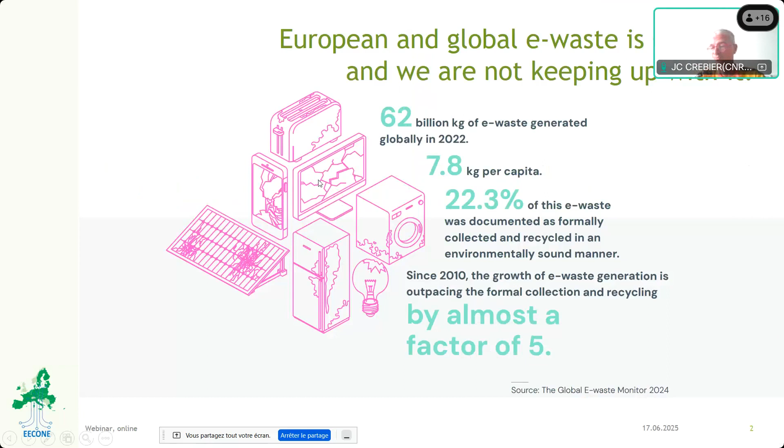We are working on 4 key objectives, which are to define green electronic components and systems, also to make those components and systems as green as possible, not only from a greenwashing point of view, but actually trying to implement innovative design solutions as well as manufacturing techniques. All this work is developed in the frame of several use cases. And in the previous webinars, we have started to present those use cases. And today, we are going to see the 3 last use cases that will be presented throughout our webinars.

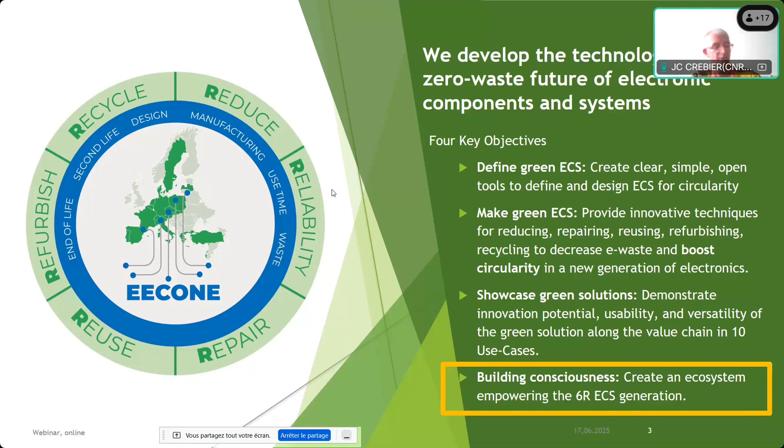The reason why we do this is because one key contribution of EECONE project is also to develop and to build this consciousness around circularity and eco-design in electronics components and systems. We want to clearly empower the community around these 6R strategies and eco-design. So today, we are going to listen to 3 use cases that are currently under development throughout the EECONE project.

First of all, we will have Thomas Ewald from BOSCH, who will speak about from waste to worth strategies for sustainable PCB and component reuse in automotive applications. Then we will continue with Christian Rein from Danish Technological Institute, who will present inks for robust and sustainable electronics. And we will conclude this webinar with Merck Tetik from Beko, formerly ARCELIK, presenting the creation of critical raw material value chain, traceability system, and recycling strategies in appliances.

So before giving the word to Thomas, I just want to mention also that in addition to these webinar activities, we are currently, and actually it is this week, running a summer school here in Grenoble in the frame of EECONE project. This summer school is dedicated to ramp up the community in terms of knowledge related to eco-design and circularity in electronics. I hope we will be able to report in a future webinar about this event.

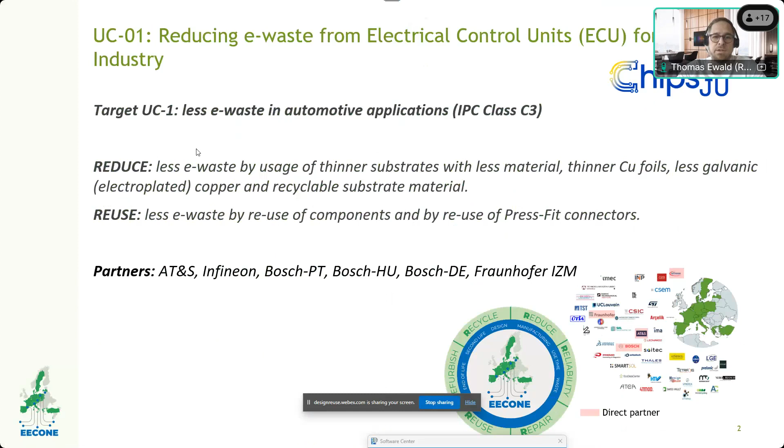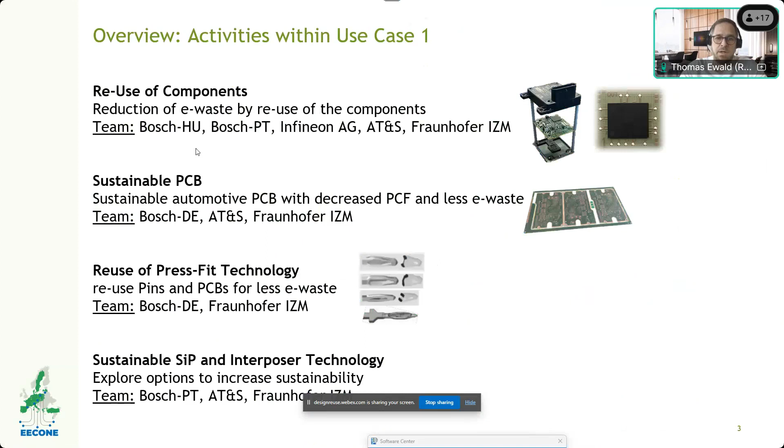And last but not least, sustainable system in packages and interposer technology, where we explore options to increase the sustainability also in this field. So all about assembly and interconnect technology with focus on automotive electronics. So then let's directly jump in the first activity. It's the reuse of components.

And here, as already mentioned, the target is de- and resoldering components, and we chose a BGA component from a radar ECU from Bosch, and the BGA is from Infineon. And the target is to be able to de- and resolder it without losing reliability. At the moment, we developed a profile for de- and resoldering at the rework station. This was very tricky. It took a lot of time, but meanwhile, it works. And we eliminated all the failures.

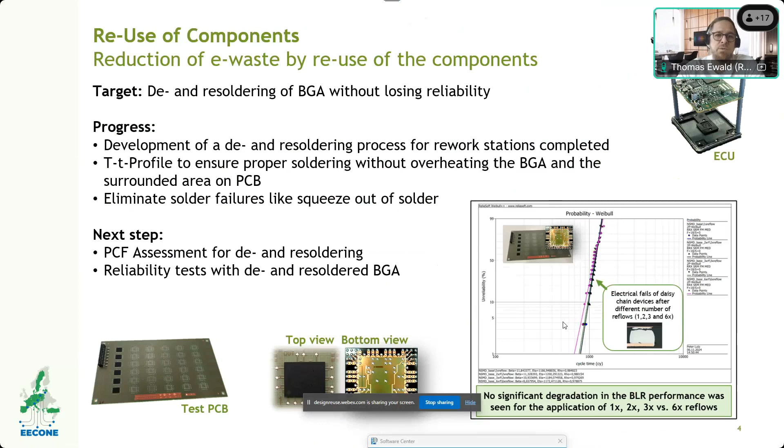And then the first question, of course, was what will happen to the reliability when we do more than 3 reflows, and luckily it turns out that there's nearly no impact, and now we are looking forward to the reliability tests of the de- and resoldered BGAs. So that's in a nutshell what is going on in the first activity about reuse of components. In the second activity about sustainable PCB.

Here the target is the sustainable automotive PCB, IPC class 3, with decreased product carbon footprint and less e-waste. And here we chose a high performance compute ECU to build a demonstrator with a sustainable PCB. So focus is clearly on the PCB, not on the ECU. And this sustainable PCB in detail is that first we made it thinner, so we reduced the thickness of the FR4 material. Second is that we introduced recyclable material, which was very new, introduced in the market by Shengyi.

And the third one is to apply less copper by using thinner copper foils. And the fourth one is a bit innovative. This is to use less galvanic copper, because this is by far the most energy consuming process in PCB manufacturing. And if we were able to use less galvanic copper, then we would be able to reduce a lot of energy consumption, and this would be very good for the product carbon footprint.

All this goes along with some challenges for reliability aspects, and this is what will now be investigated in depth. So the demonstrators are already built and already tested, and now we're waiting for the evaluation of the results. And hopefully we will find out that it works very nicely and smoothly with these sustainable PCB measures. Another aspect is to calculate the product carbon footprint benefits from this sustainable PCB, which is done at the moment by Fraunhofer IZM, so that in the end we really have a kind of quantitative proof of how much we improve with regard to product carbon footprint and also to e-waste.

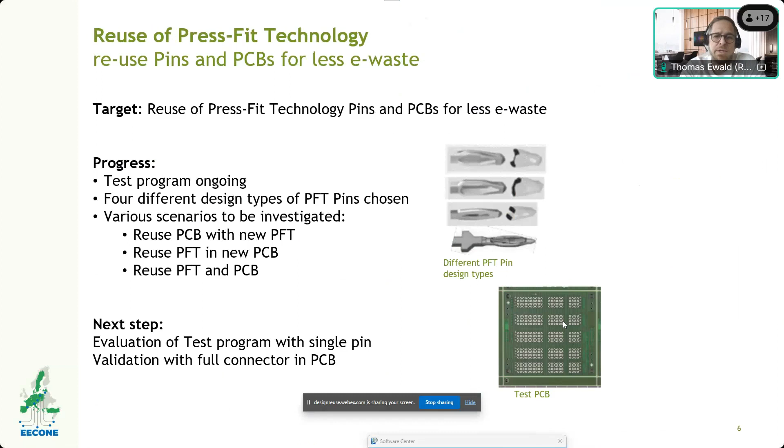And last but not least, we are also looking in the field of sustainable system in packages and interposer technology. And here also we want to try to make this technology more sustainable. So the first one is the reuse of SIP and interposers. So for interposers, we discarded it because this is not a real business case when you have to remove all the components, the solder, the copper, and then to reuse the interposer again.

This doesn't make sense from a business point of view, but what might be interesting and what we are looking at is the reuse of the whole SIP module. This is a bit similar like the BGA reuse of components, where you remove the balls and reball it again, and then you can use it again.

Another very obvious thing is to investigate how thin can the interposer of a SIP be. So the same like in the PCB, because if you make it thinner, then you save material, and less material means less product carbon footprint and less e-waste. And here we are investigating what are the lower limits, because warpage will be an issue then at some point in time. And also IZM, Fraunhofer in Berlin is calculating the life cycle assessment of these thinner interposers.

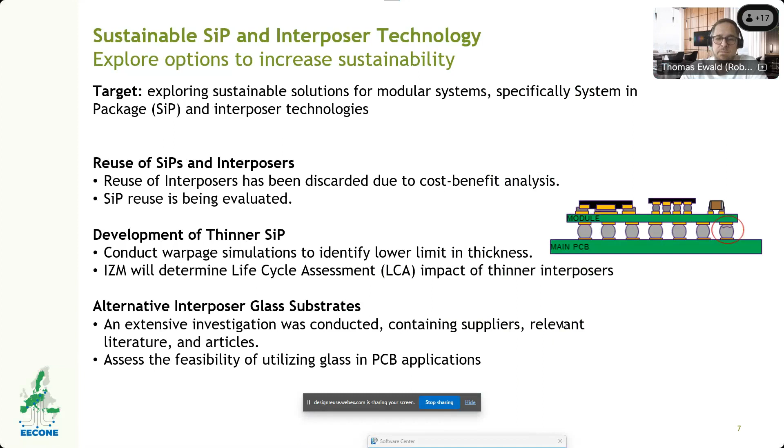And last but not least, we are also looking in the field of other technologies which are really out of the box for automotive applications, like glass substrates. They have many advantages, but also some challenges with regard to reliability. And here we are doing a kind of screening of the market and trying to see if there's some innovative ideas with regard to sustainability. So that's in 11 minutes, in a nutshell, what is going on in use case 1.

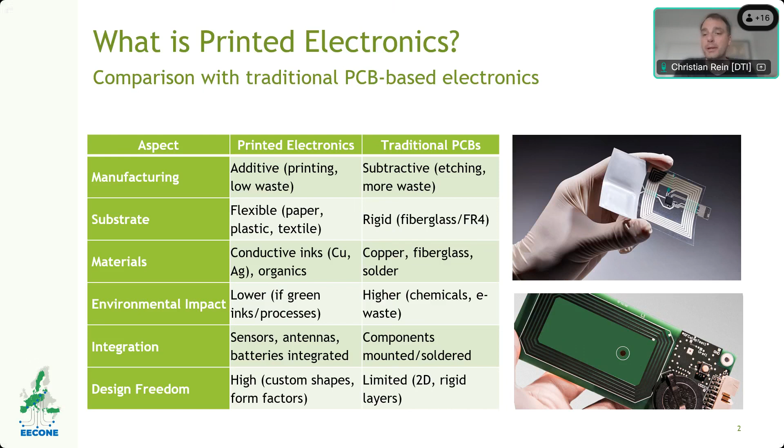And the use case that we have here in EECONE is what we call membrane switches, which are normally produced by the Danish company Melsontech. And we are collaborating with Synano, that is producing the carbon inks for this design. And we are developing conductive inks for this use case. Normally, these membrane switches, also known as keyboards, are meant to be used in harsh environments where they are used as input for operators operating machinery.

And the system overall is a multi-layered system of plastic that can be attached on the surface, and is currently using silver as the conductive tracks. Carbon is derived from fossil-based fuels, where you are then using the carbon layers to provide mechanical or friction resistance on certain areas of the electronics that otherwise would lower the lifetime of the overall electronics.

So in use case 3, we'll try to improve these membrane switches through the 6R strategy. This involves reducing the environmental impact and its vulnerability to environmental conditions, hoping that we can increase the lifetime. And it requires us to look at the very material composition of the inks used in producing these membrane switches. This also includes the use of eco-design in order to optimize the overall composition and choice of materials.

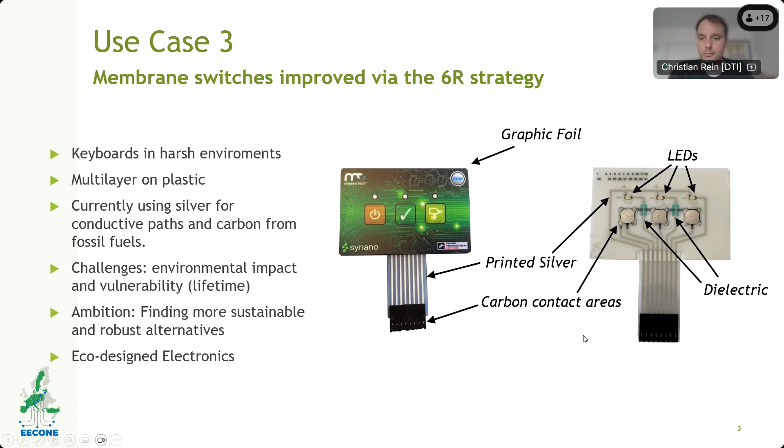Let's see if we can go on.

The inks are normally determined by a combination of various components. There are the fillers that provide the overall functionality of the ink. For conductive ink, this would of course be conductive materials, such as copper microparticles, gold nanoparticles, silver flakes, or carbon nanotubes, mixed up in a solvent, a carrier for these filler materials that can also modify the rheology or drying behavior of the overall ink.

The binder provides the adhesion between the material and the substrate, which is very important when you're doing this printing. And then we often also look at the rheology control and stabilizing in order to make sure the printing process and the lifetime of the ink itself can last as expected.

As you can see here in this scanning electron microscope image, you have an agglomeration of particles. Some of them are surface passivated, for example, to provide the right stabilization. All of this is mixed into the ink, as you can see in the picture.

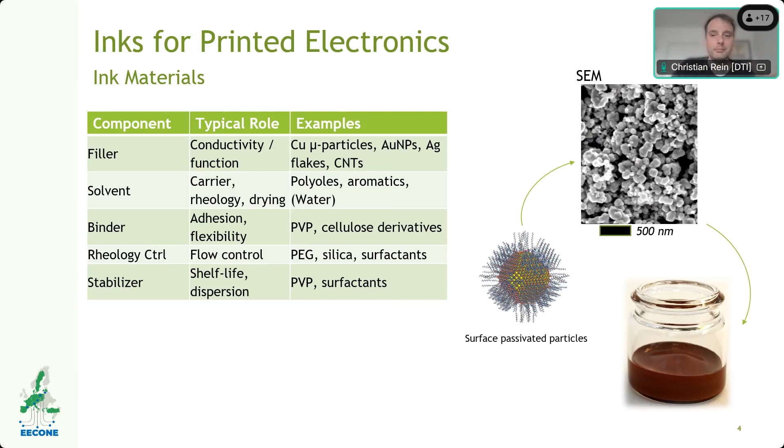For example, for inkjet, you would also take into account density and surface tension in order to have the right flow dynamic. Then there would also be similar considerations if you're doing roll-to-roll production for upscaled production.

So when you're looking at the printing, here we're showing the copper ink that we had in the picture before. We are applying it to the print screen, flooding the screen, and then afterwards we have it on top of the substrate, the plastic, for example, where we are then squeezing down the material to create the printed tracks, as you can see in the middle image.

After this printing is done, you need to remove the solvent again. Now just going through the hassle of mixing everything in, you need to take out a lot of the organic material, otherwise you're just blocking the conductivity. Through that, you first evaporate through the curing, and then put it through a post-processing step of sintering. For example, with copper inks, you need to make sure the copper particles are fused together through this sintering process in order to provide macro scale conductivity throughout the entire length of the electronics.

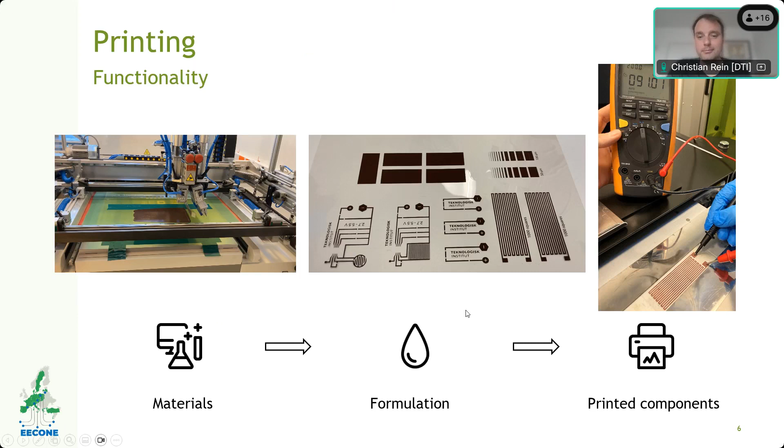We often use a 1,000 square standard test grid, as you can see in the last image, in order to validate the conductivity. There are also other ways of validating the quality of these inks, such as making sure it can withstand adhesion and mechanical stress. Otherwise, it's of little use if it just flakes off.

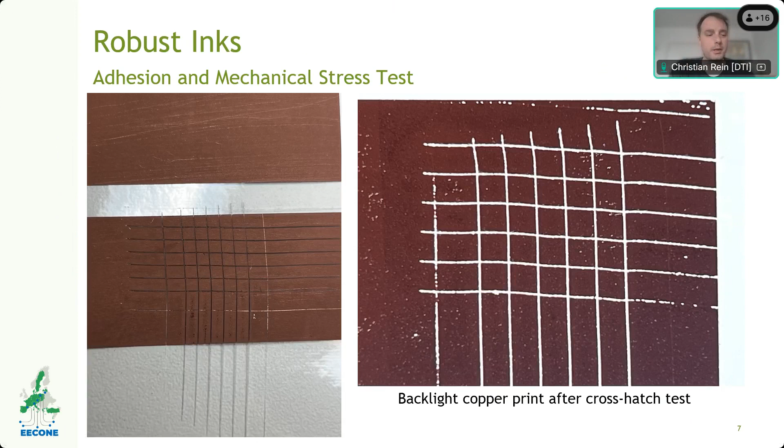So we apply, for example, crosshatch testing, where we're scraping and brushing and trying to peel off the material after we have deposited it. Based on that, we can also get an idea of the application worthiness for electronics.

We also look at, for robust inks, the need to withstand a lifetime of use. For example, these membrane switches should last several years in a harsh environment. For that, we need to have the electronic powered while cycling the humidity and temperature in environmental chambers. Then we follow up by investigating the failure mode - what went wrong, how can we improve the design, and make sure the electronic lasts longer. Electronics that last longer is also electronics that you do not throw out, thus reducing waste.

One of the questions that sometimes comes up when you're suggesting a new material to include is, well, why didn't the status quo work? Right now, a lot of silver is being used in printed electronics since it's been the standard, silver flakes. But one of the things that needs to be taken into account is the very high climate change potential and overall environmental impact that using silver has in comparison with copper.

Shifting from silver to copper reduces the overall environmental footprint by 96.5%. Thus, there's a very large driving force to move into the copper particle regime instead. This is what we have been focusing on in EECONE.

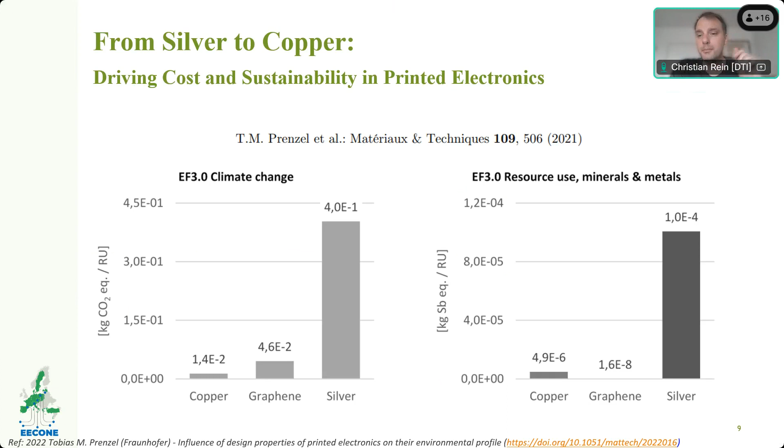In this project, we are looking at other aspects as well. For example, there's also the aspect that silver is being used in a lot of key technologies, so there's a danger that silver is a scarce resource. And then there's also the silver price as a driving factor - when you look at bulk materials, copper has a lower overall price compared to silver. So that's also an industrial interest if we can nail down the right ink formulation in order to introduce copper inks instead of silver.

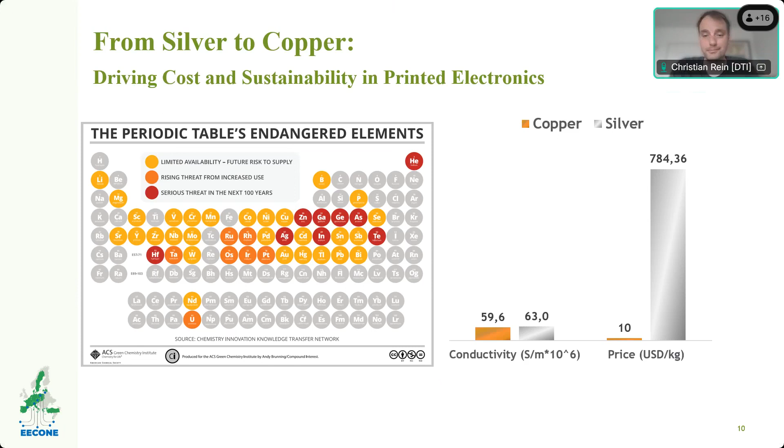Some of the tools we're using through this overall redesign of materials and electronics are safe and sustainable by design methodologies, life cycle assessment, but also the eco-design tools that's been developed. There's some also here in EECONE. It allows us to get a better track of what kind of materials can be put together and what the benefits would be.

One idea is that we could look at a more circular system for materials, where normally we take particles extracted from primary resources, formulate those into copper inks, and then screen print them to create the copper electronics. After shredding or end of life, we would like to leach out the elements, leach the copper, and then reform the copper particles from the copper salt in a resynthesis process, as an alternative to the more non-circular end of life where we would have incineration or landfill.

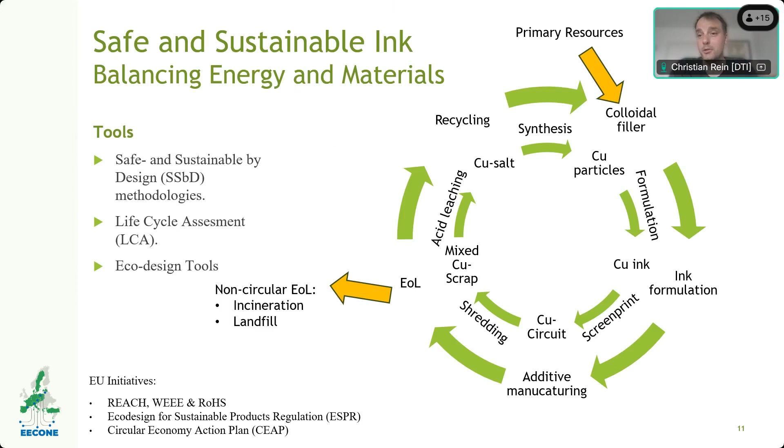As already introduced, these are some of the driving forces for moving to these kinds of designs in electronic production. There are also European initiatives that need to be considered when designing these inks. There's consideration for nanomaterial effects, the hazardous materials that we could include or not include in ink formulations, as well as how to design this for recycling and easy extraction of the material in the end. This would also tie into the new initiatives of sustainable products regulation and circular economy action plans. All of this is done together with the rest of the partners and institutes in EECONE, where we are trying to make the next step in sustainable electronics.

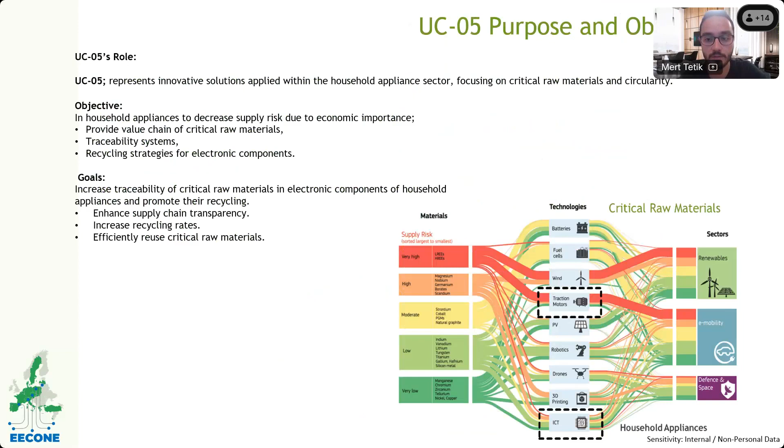We will do it firstly by building a stronger value chain around these critical materials. Then we will be putting the traceability system in place so we can always know where these materials are. And finally, by creating better recycling strategies for electronic components. If we come to the question, what are we aiming to achieve? It's for better traceability of the critical materials in our appliances, more transparency across the supply chain, higher recycling rates, and smarter use of the valuable materials we can't afford to lose.

We are planning to reach these goals by making everything more traceable and transparent systems. We will be using QR codes and barcodes to give you...

Sorry, yes, I think we lost the screen. You were mute for a second, and you don't share anymore the screen. Can you share it again? Share again. Sorry, okay, perfect. Thanks. No problem, thank you for warning. Okay, so I will start from here.

I already told that by reaching these goals, making everything more traceable and transparent, and improving how we recycle and reuse critical raw materials, we will also be using some smart technologies like a smart tracking system. This is like QR codes and barcodes to give every electronic component its own material passport, so we can always know what is inside and where it came from. Data integration: all the players in the supply chain will be able to share information clearly and easily, meaning better coordination and more trust. The third one is recycling technologies: we are also developing new and more effective ways to recycle those high-value materials so we can get them back into the loop instead of losing them.

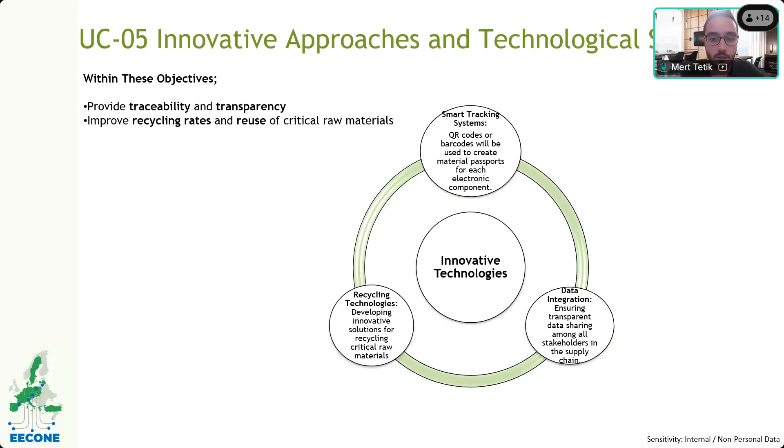So in practice, we will be gathering detailed info about the critical raw materials in the bill of materials, known as BOM, a full list of what is inside each household appliance. As components come from different suppliers, we will build a digital passport for the product, linked to the barcodes or QR codes placed on each electronic component. What does it mean? It means when you scan a component, you will instantly see what it's made of, the quality of these materials, and even how it should be recycled. So if I need to shortly summarize: it is simple, trackable, it's a smart system.

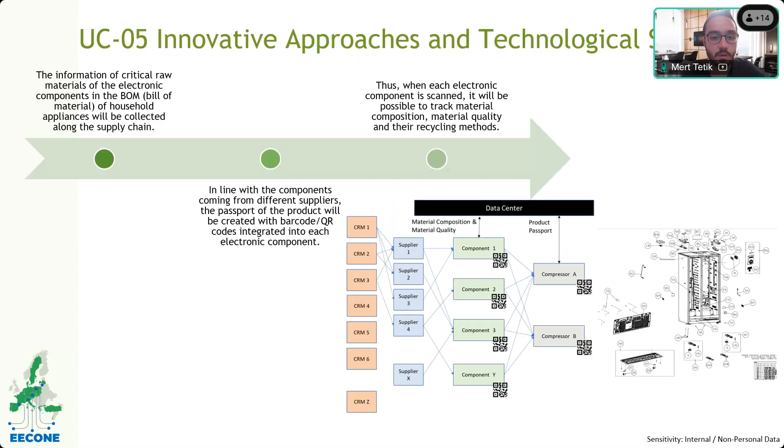We choose the refrigerator compressor as our focus device as the first home appliance because we are working there. Since our expertise is in compressors, we are concentrating on both the compressors themselves and the inverter cards used with this compressor, which is the PCB.

First, we identify every component on the electronic cards. Then we started investigating what these components are made of, and we reached out to our purchasing team to collect material declaration forms from the component suppliers. Even deeper, we used an XRF device to perform elemental analysis on the components.

Finally, we sent our compressors and inverter cards to the recycling company, which is also working at the EECONE project, to explore the possible recycling strategies.

So for the second partner, the recycling company, their role is focusing on developing recycling methods and applications for recovering critical raw materials from electronic components. They are working on innovative ways to recycle these parts. Together with BEKO, formerly known as ARCELIK, they are creating practical and actionable recycling strategies that can be applied in a real-world system.

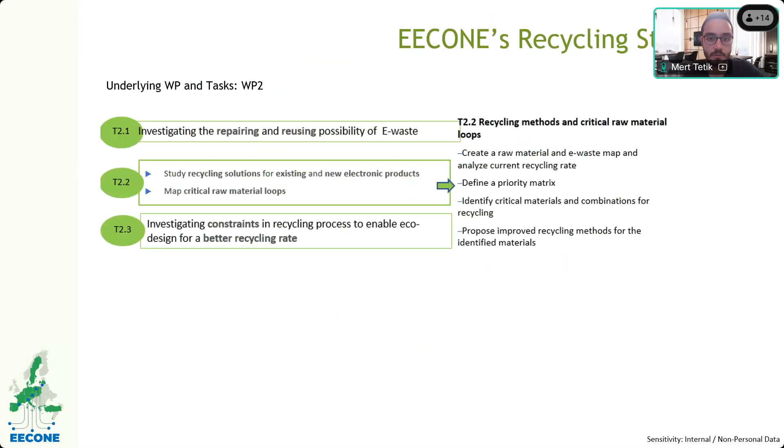So here, let's talk about the goals we are aiming for and what will come next. First, the targets: we want to increase recycling revenue from PCBs by 300%. That's a major leap for us, and double the amount of recycled material, a full 100% increase, and boost the reuse rate of critical raw materials in electronic components by 50%.

So as for what's coming in the future, after this project is wrapped up, we are not stopping. We have clear next steps. First is industrialization, which means scaling up the technologies we have developed, getting them ready for real-world production.

The second one is market deployment, which is launching these solutions into the global market. And the last one is expansion, which is taking this system and applying it across Beko's international factories.

And the big picture is that we want to take the impact of EECONE even further, helping to drive global adoption of this circular economy solution and making sustainability a core part of how the industry operates worldwide.

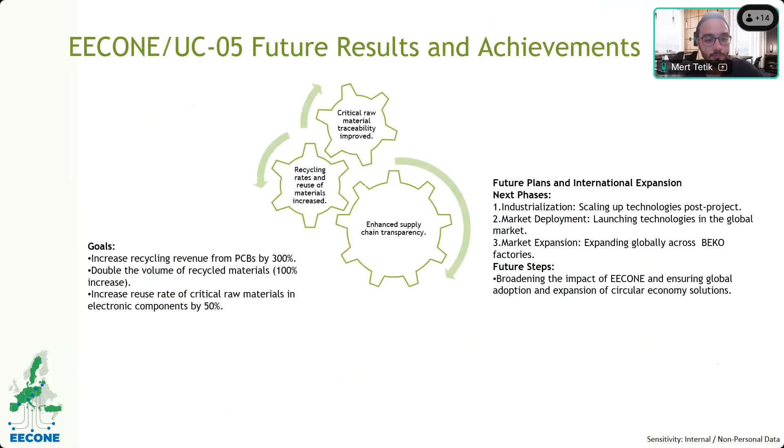And thank you for listening to me. That's all for use case 5.